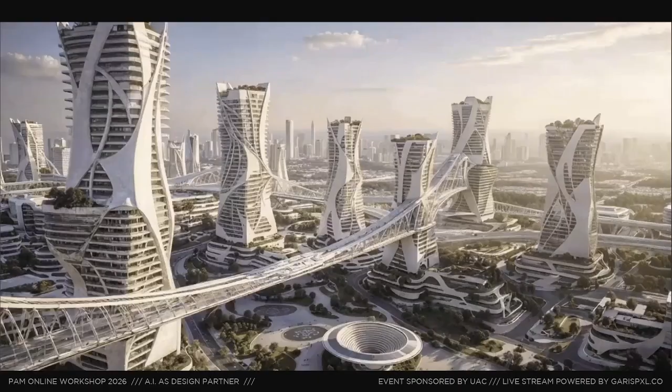So hopefully this becomes a great starting point for a longer, broader conversation into the changing practice, this new and emerging landscape that is unfolding underneath us. So I'll be describing AI in architecture, the future of practice, and how really the latest generative AI tools are starting to have a considerable impact on day-to-day practice and a considerable impact on the creative profession. This is from a workshop we hosted, a student, Prasana, who completed this in just a few hours of first using the tool.

Now, a brief introduction, I think it always helps. From myself, I am an architect by training, originally from Italy. I studied at the Architectural Association, worked many years at Foster's in London, Foster and Partners, and then went to Harvard, started my own practice, did a lot of consultancy work, advising medium and large practices in these earlier days of understanding what AI was going to change and influence in the profession. And it's been really exciting to work on a national level with RIBA and the AIA in the US in their AI expert advisory groups. I also teach at Harvard, and I like to keep an academic hat on as much as possible.

Even though things are really exciting and kicking off with this platform, which I'll give you a glimpse into in just a moment as a segue for broader conversations. But this is a glimpse into Xfigura. You can see us as an early ideation and concept design tool, which leverages all of the best generative AI models in one place.

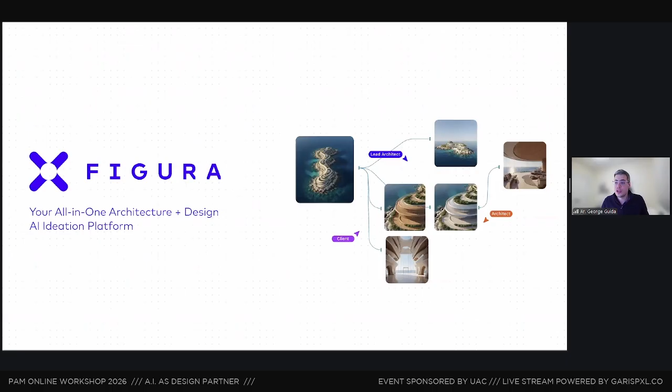Okay, I'm going to take a next step and jump into AI tools in practice. For this, I will be using Xfigura, the platform which I founded over a year ago.

We have seen incredible growth in the last 5 months. We're a team of almost 15 now, and we just concluded a big fundraise, so we have a lot of great momentum internally. We have a lot of new ideas, and I'd love to hear your thoughts in the Q&A, and answer any questions you might have on this or other applications of generative AI workflows in architecture.

I couldn't do it without this incredible team. Our partners have really been expanding and growing in the last few months. This is a short list of a longer list of clients. We are mainly business enterprise first, but we also collaborate very closely with universities and institutions globally, from Harvard, Penn, to American University of Sharjah, London, Hong Kong, all locations.

You can see the platform Xfigura as one collaborative platform in which you can create endless workflows, endless possibilities within this ideation and visualization framing. We have all of the best models on the platform already, about 70 models. We handpick these and get a lot of feedback.

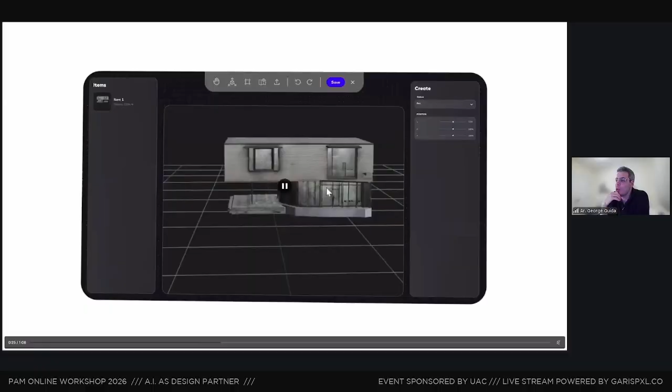Every great design - so this is a glimpse into the platform. Every great design begins with a direction, from a single idea in which we can start imagining different possibilities. You can see the infinite canvas here. You can click and then create - essentially you can see these as mini apps. Each node is connected to one another. You can navigate from one node, from images to videos, and go back and forth to render, to relight, to make videos, to convert images into 3D. There's so many fun different workflows.

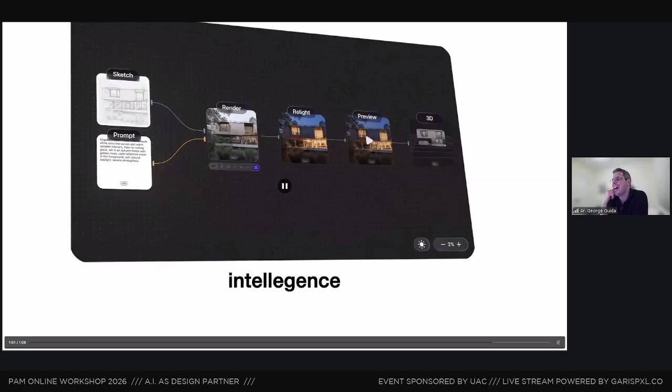And then of course you can create lots of automations, templates. We are launching - well, we have launched - agents, and this agentic space is just going to get better and better. We're fully enterprise ready, you can share boards as view only, as edit only. I'm going to try not to put a sales hat on and keep this more conversational and workshop-like, because I'd like you to take as a takeaway from this call more of an exposure into the different models and different tools. If anyone is interested, we have the credits, and we can engage in conversation and guide you along this journey.

So these are some fun workflows that we have embedded in the tool. These are all of the core concept design workflows. Now it's important to understand that the basic, fundamental workflow of these generative AI models starts very much at the prompt.

If we understand how to communicate design intent, how to communicate an idea, we are almost there. It's really interesting - this constant conversation between understanding how to work with these tools. You still have to learn how to communicate with these models, but also how to take one step back as a designer, remove any intuitions we might have on language and how we describe architecture, and really boil things down. Let's describe materials, shapes, aesthetics, camera locations, a feeling, an aesthetic. There's so many things that we might otherwise take for granted, and now we have to really describe.

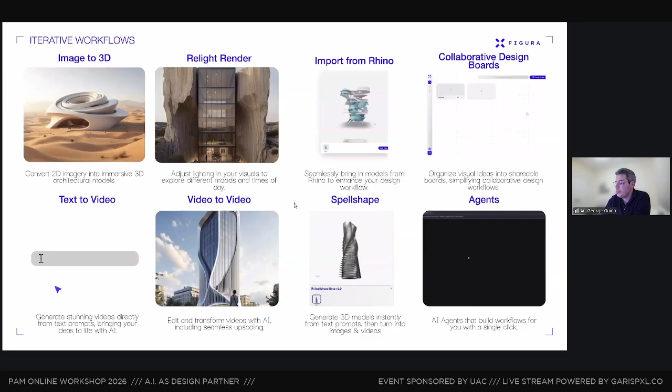So these are some other workflows. We're seeing a lot of interest, a lot of use cases in the video space, and I'll give you some glimpses, as was asked of us, to show how some companies are engaging with Xfigura.

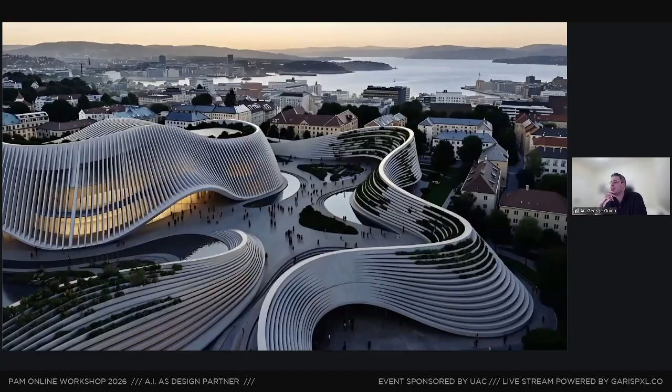So this is just a glimpse of some video workflows, of some transformations, of some geometries. Now there's lots of video models out there already. And what's interesting here, you maybe can't quite read it, but we're starting to stitch the very first frame with the very last frame and then combining these together to create different scenes and different connections.

This, I would say, actually is not the latest models out there. There are models that produce much higher resolutions. So in Xfigura, we like to question different topics.

Can AI actually participate in design? Can AI actually participate in the thinking process? How as a platform should we engage? How much agency should we embed within the prompting mechanisms for the architect, and how much should we support within that process?

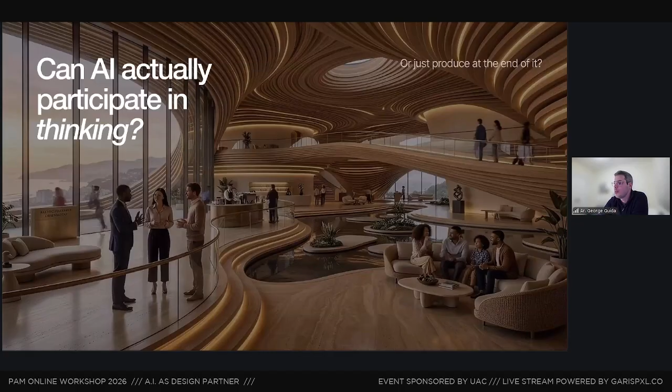How can AI actually participate in creating workflows? And so we have an agent now which does give the possibility, from a text prompt, to create a full workflow already.

And so our mission at core is really to enhance and not replace architects and designers. And so we're really trying to push for a new type of design quality, versus merely discussing things of automations or templates, which are often at times prioritized.

So this is just a glimpse into some workflows that are being used in different practices. We've seen an incredible adoption from companies, for example, at Big Architects. We've got adoption across multiple offices, same with Zaha, KPF, FaulknerBrowns. We're seeing hundreds of users within each of those practices really push the design conversation, or also really start producing in new collaborative ways within teams.

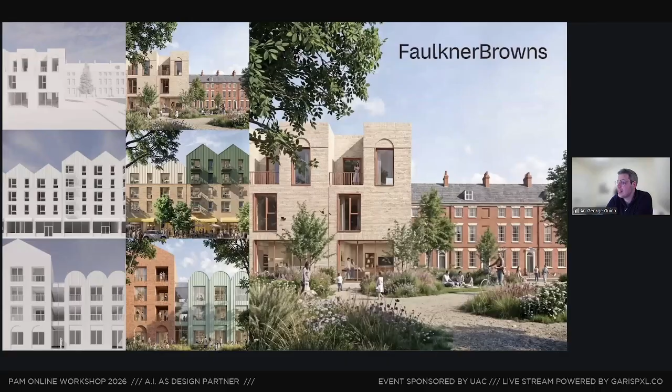So this is a glimpse into how FaulknerBrowns, a British company, is using it to go from clay renders into final client-ready images. These can be further upscaled, improved. They can be sketchy, they can be stylized in any way. However, with a few controls and prompts and iterations, you can get to this quality.

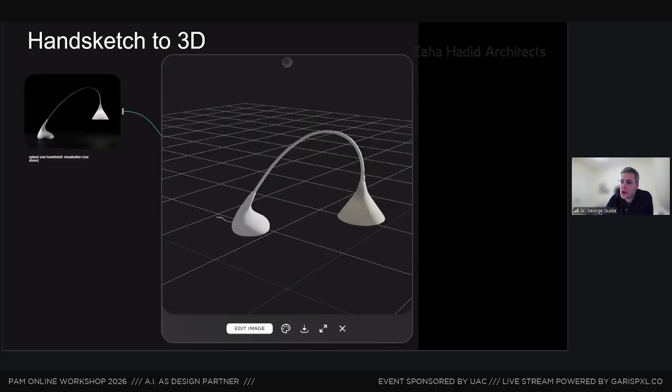These are some images to show how Zaha is starting to engage with it - in relighting scenes, in converting images into sketches, into extracting materiality, or starting to convert different shapes and apply new tectonic systems to their interior spaces. This was part of an article that was recently published with RIBA Journal that just came out, I believe, a month ago.

And finally, this brings us to Big Architects, also really diving deep into so many workflows - going from single images, changing materials, changing times of day, adding people. They've explored so many interesting conversations and have been really central in influencing our roadmap and helping us understand what is useful, what type of tools should we start exploring, and how are architects actually engaging with these.

Relighting, material, model explorations from physical to digital, digital to physical, image to 3D model, back and forth - we're seeing such interesting possibilities across these practices. So we're seeing this gradual shift, and this is up for an interesting discussion I would love to engage with, which is a potential shift from AI solely seen as a tool into AI actually seen as a collaborative agent.

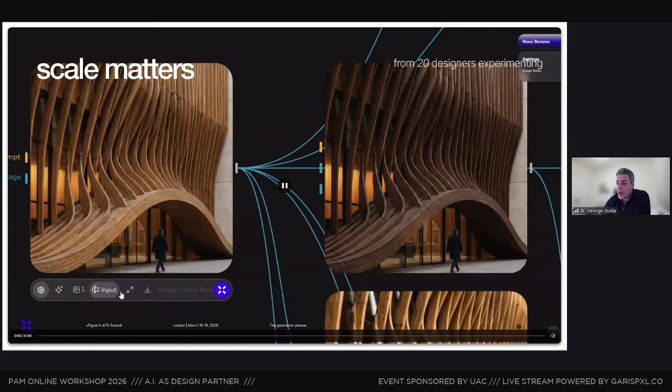Scale matters, so we can begin from a single workflow. We can explore super high-res images. We can make more complex workflows. We can go from the high level, from zoomed out views.

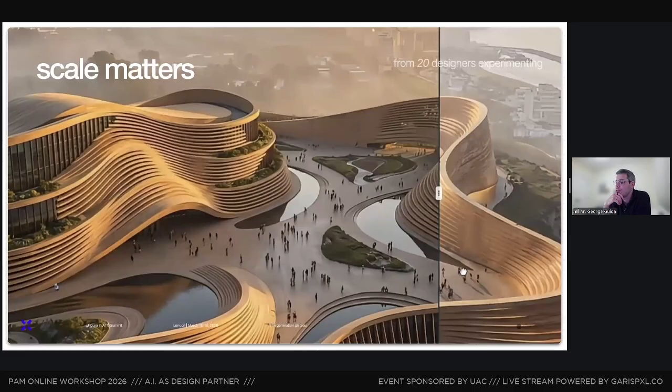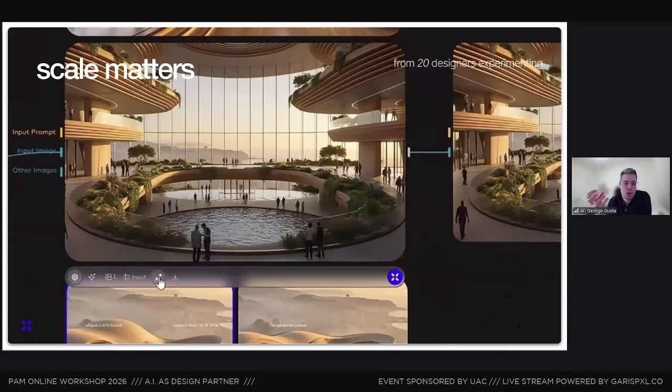We can zoom straight into details. We can leverage these generative models to give us a glimpse into different tectonics, different systems that even form the assembly of these. We can then in-paint, edit some images—think of it as a mini Photoshop already embedded in the platform.

You can change views, you can prompt, it's very versatile. Now it really boils down to understanding how to prompt. How can you converse with these models? How can you engage or ask the right thing based on your own design intent? These are just to cover a few other workflows.

Now, it's important to remember with these models that there's no physics understanding. If there's a column flying, spinning, or doing strange things, that is back on us as architects, with our disciplinary knowledge, to say okay, no, let's stop for a moment.

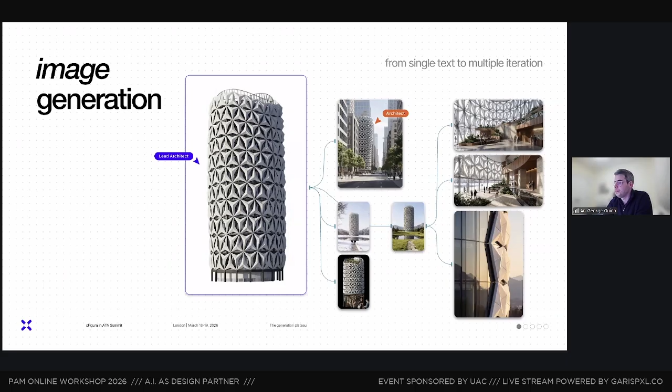These are trained on image datasets. They do come with a full bias. There's no such thing as an objective dataset. So with that awareness, we can prompt and bring in our own subjectivity, our own references, our own styles.

And we can begin moving past the single image and start bringing a client along a journey. Let's actually move past the static render and begin discussing immersion, storytelling, narrative. Let's bring a client throughout this building, from the entry to the spaces, to interiors, to across a site.

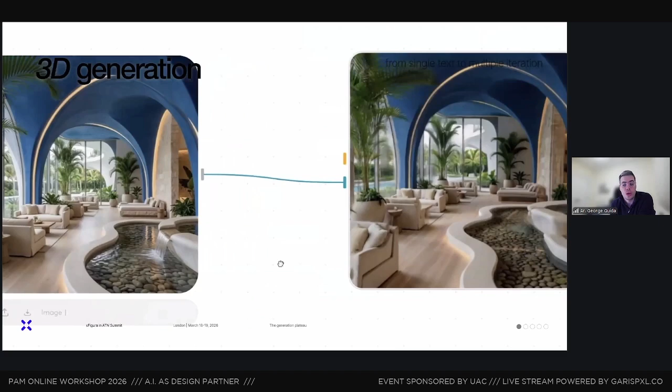Now this is gradually expanding. You can see this is a glimpse into the world model. This is by World Labs. It's a model called Marble.

So you can convert a single image into a 3D space. It is imperfect today, but it's a really interesting glimpse into how things are going to change. And so from the single image, you see we're able to create a full space.

This is what's called—going back to the technical—a Gaussian splat. Think of it as a point cloud, which is, of course, for architects, very difficult to work with, but it's opening up a new type of conversation.

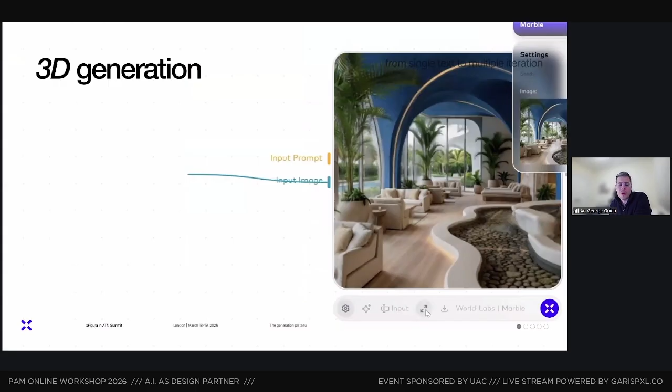Can we start designing with prompts? Can we start editing in different ways versus always having to have the full editable surface? We have added some multiple workflows in this so you can use it. I would say the use case of this for now is to change the view with control of an image.

You can now keyframe a video through this space. We're launching this very soon. And then you could do a video-to-video workflow and then create a view or an animation through an interior space. This does not work very well at all for 3D, for exterior spaces.

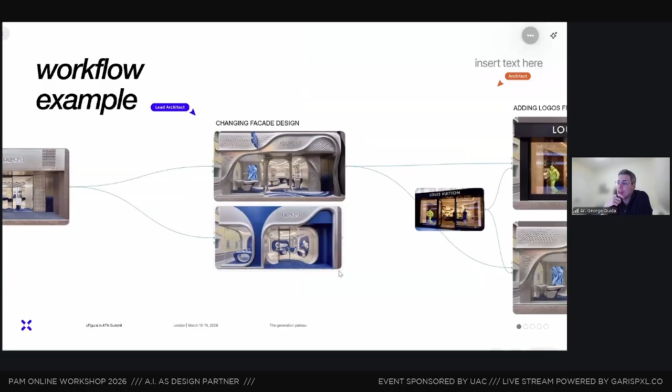So think of the use case more on the interior side of things for now. This is just a glimpse of some other workflows. So we have a render, an input render, maybe lower res on the left.

We can then convert it and ideate here. So let's ideate, add a Louis Vuitton aesthetic. Let's bring in different bags. Let's bring in interior elements, and then start creating our own workflows.

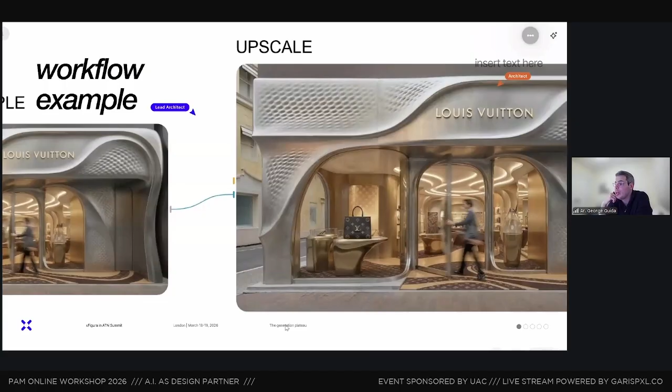I want to change the flooring. I want to in-paint, so I can paint like in Photoshop, add people in it with a blur. That may be something I want.

And then our final image is an upscaled image. You can see it's times two. And so you can get, this is pretty much a render-grade output. You can actually upscale much more than this at times four, or use some of the other models as well.

This is a last example of a workflow in which you can create different scenes, different moments throughout a building, and you can see how you can start bringing a client along a journey through different moments, different seasons, different spaces, through concept designs, through sketches.

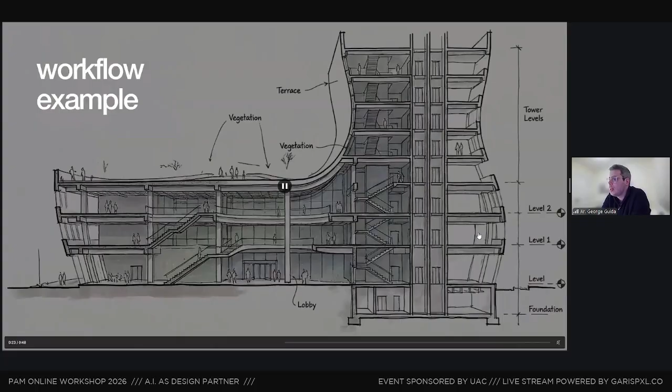It's really fun. We've seen so many offices really engage with these tools across all different stages within concept or competitions, even for submission boards. So we should really start expanding the possibilities, and we need to think less about the actual individual render, but more about what we as architects bring to the table.

So to close, and for some final few slides, I wanted to highlight what's really coming out now, because everything I've described until now is gradually being adopted, and what's really coming in the next 12 months, actually it's already here, and its adoption will certainly come in the next 12 or more months, is this idea of agents.

So do we make better decisions alone or with the assistance of AI? This is an interesting conversation we're having internally. How should we build our tool to support architects? How much should we support them versus encourage a training mechanism to encourage learning, education, and this creative process?

And so part of what I teach and part of what we build at the core of Xfigura is this solid feedback loop of information. We're never trying to replace architects. It's always giving architects this full multimodal control. Hence our opposition to the current trend, which is the no UI trend.

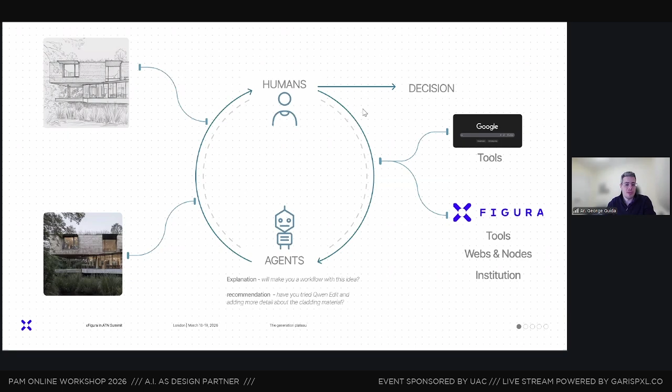This is a small glimpse into our current agent. This week, by Monday, we'll get a big upgrade. So you're going to see web search, you're going to see a lot of new automations. But at the moment, what you're able to do, of course, is enhance prompts and all of the basics.

But you're starting to be able to use different tools from this prompting interface. So you can text prompt: I want to generate a workflow of a tower with a video, and then use different prompts to automate those videos. And so it's a text to workflow. It can create that custom workflow, which is very much different from one architect to another.

Some closing images, 2 slides. This is just a glimpse of some other tools. You can obviously upload your own geometry. We have an editor, which is like a mini Photoshop, and then you can control parameters or actually train your own image data sets.

We do have all of the necessary plugins at the moment, so you can use Xfigura directly within Rhino. You can use it directly as of this coming Thursday. I believe we will launch it in Revit, and Speckle is already live, and you can connect Pinterest. We've seen a lot of interest in tools, creative tools like that.

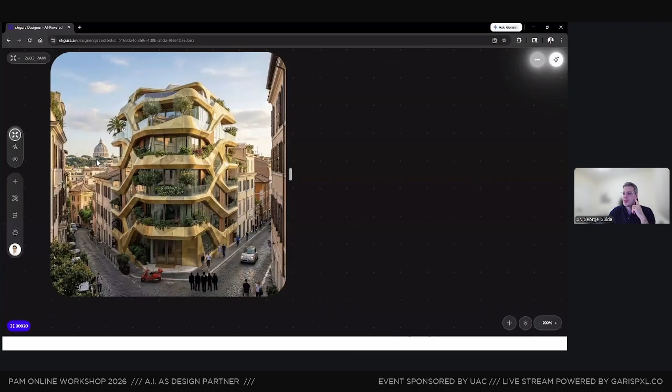So what if I have an image? Let's say, what if I had this image I really liked and I liked the aesthetic behind it. I grew up in Rome, and I was thinking, what if we could think of a palazzina or an urban block in Rome and reimagine it in a crazy, provocative way. We also connect that to text and start getting the description of that image. So all I'm doing here is reversing the process—going from image to text as a way to teach myself how the model is understanding it.

In this case, a common application is using a past render we've spent thousands of dollars on. What are the prompts these models might use to understand, to then generate new images? A visually striking futuristic apartment building—you can see now we're getting the model's interpretation or suggestion on how we can start engaging with these models. This is an excellent design discussion, in which we can start understanding what is necessary for us to communicate our design intent to express this level of complexity without any assumptions. So we can describe what's in the foreground, the camera location in a certain perspective, what's in the background, is this a tessellated materiality, what is the material?

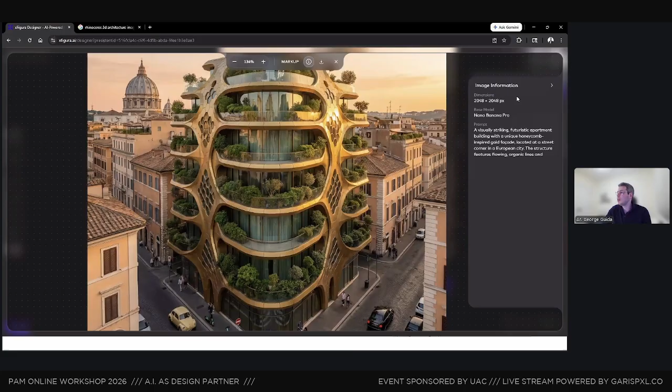Usually a faster model. Please feel free to write in if there's another way of signing into the webinar - maybe that's a question in the chat.

So what we're doing now is image to image. And what we can then do, what I do suggest, is continuing this workflow - really iterating and adding steps along the way.

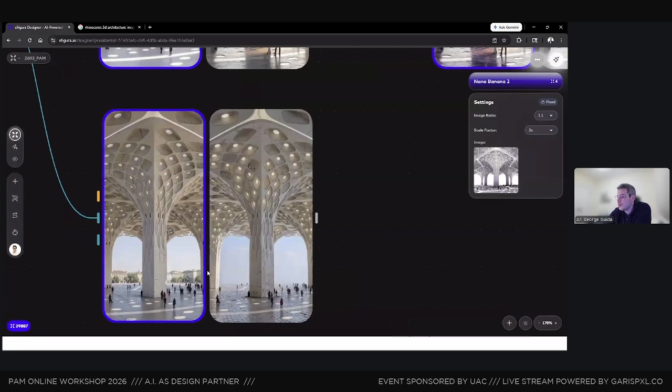golden, what is it? Add golden cladding within a tropical environment. We have, where was that added, some other model with Kling. We have the 4 options we can choose from, right? Colder, cold. Maybe we should have done the more tropical one. And then you have a 3D model.

This is, I use this more to show its limitations. This works much better on the object scale versus interior scale. Let's see what happens.

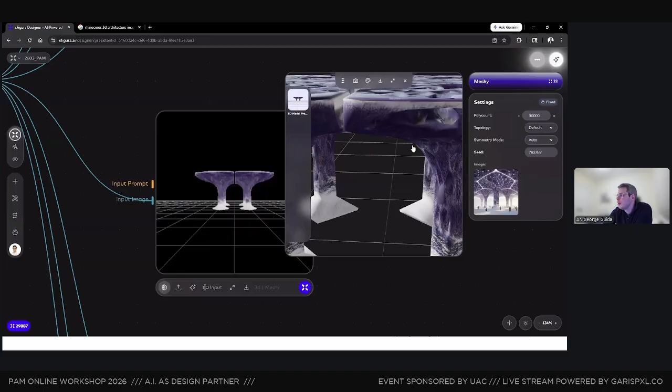Okay, so you see the resolution. In this case, we could have chosen a higher poly count output. Sometimes you do not need a high poly count output. And you can choose what type of topology to have as an output, it can be quads, it can be different formats. So you can kind of see the resolution maybe wasn't enough here, but at least you can start getting a basic 3D model that you can start putting in renders or start assembling within a scene.

I would say for some geometry it works very well. For other geometry it does not work, especially when you're adding a lot of detail. But these models are always improving, literally every few weeks or week.

Okay, so you can create templates, you can automate, you can always access your history if you generate over an image again, and you can browse that and literally drag anything back if you've lost it. If you overwrite, click generate once more to get more images.

So this is, in a nutshell, the core workflows behind xFigura. I'll take a few moments to walk you through some workflows, a quick intro into prompting. These are things that we offer as workshops to our enterprise clients.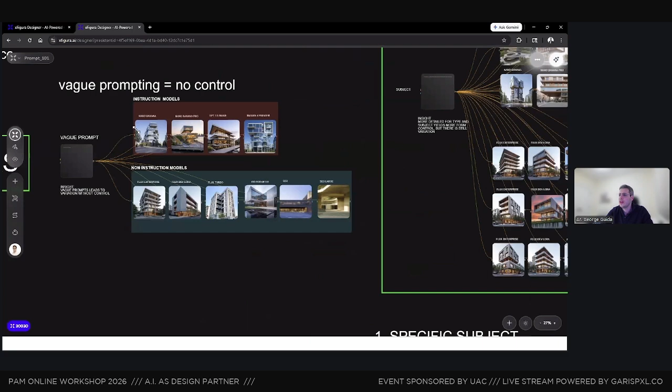We go through how to prompt for interiors. We compare all the different models, let's say from modern buildings, talk about biases. We compare the old non-instructional models to the latest conversational models, and how prompting really has an important impact on that final result.

Adding details, adding specificity, doing text to image, and these are the core use cases as explained. We go from a floor plan to a render, and we have an interior space, and then add a material. This is the same topic as the style transfer or the blending of images.

We can say within the prompt, change flooring material using the second image. A very simple prompt, and it keeps the coherence input to output, and then we can see, okay, that's the result. We can use the editor to bring furniture into a scene.

From here, we can place it. We can rotate it with a prompt. We can add whatever really comes to your mind, you can do it.

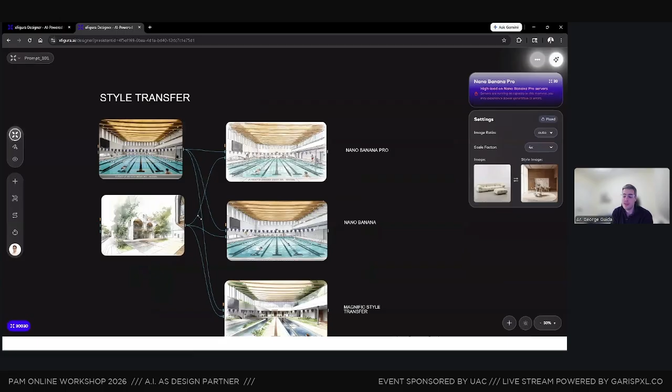Now, what I really find interesting, especially within concept design stages, is going past the hyper-realistic. You can, of course, always do the hyper-realistic, even with style transfers. But what's really interesting also is within this concept design stage, could we leverage models like Nano Banana Pro, or let's see...

Magnific Style Transfer, which is one of my favorite models actually. It does really incredible style transfers and keeps the original input style. And so maybe the input was not exactly an input that I would have used, but you can see from here, you're able to get really interesting concept design images in whatever style that you like or are interested in.

This is how to add materials. So we can have an input image. We can combine not just style, but also a tectonic system. Could we add this module within our interior?

And so what we're doing here is we're prompting it in a way: add the unique elements from image 2 into image 1. It is a very ambiguous prompt, so it does give liberty to this model to interpret where to place these. I would say still imperfect as an output.

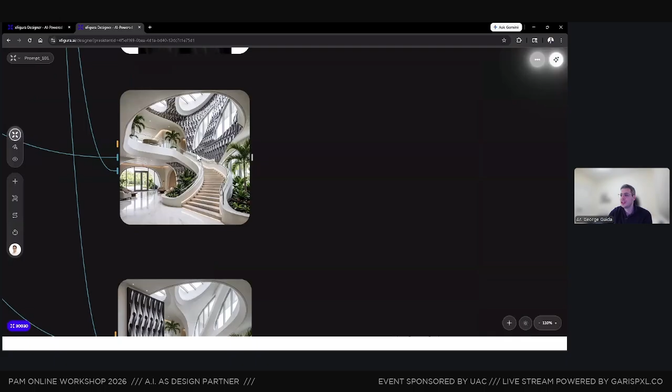But we can be a little more intentional about how to apply it, where to apply it, or how to add it, even, for example, as a large painting within the scene.

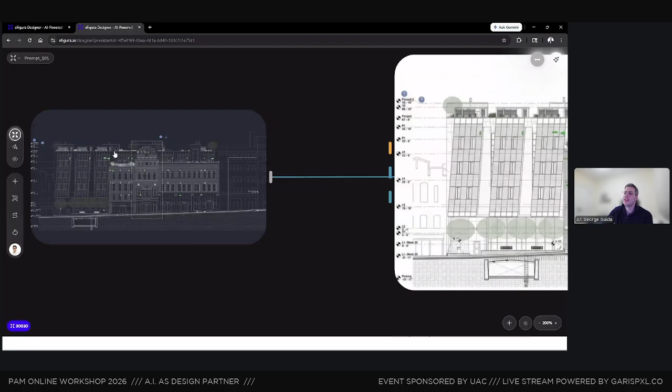Yeah, so these are a lot of different workflows. This is a glimpse into some of the latest Revit tests that we were doing: exporting a Revit screenshot, converting it into an image, and then rendering that image from this right here, and then actually testing out different materialities.

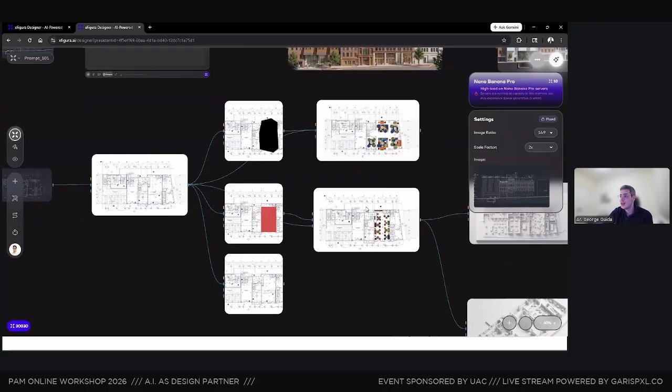Of that geometry, we can even work on the floor plan, and I will say that these are raster images. They are not lines that you can actually edit, but these models are getting incredibly good in a way to be able to... this is not the best example. There are way better examples than this.

You can start changing representational style, getting axonometrics, different views, all starting from a single floor plan.

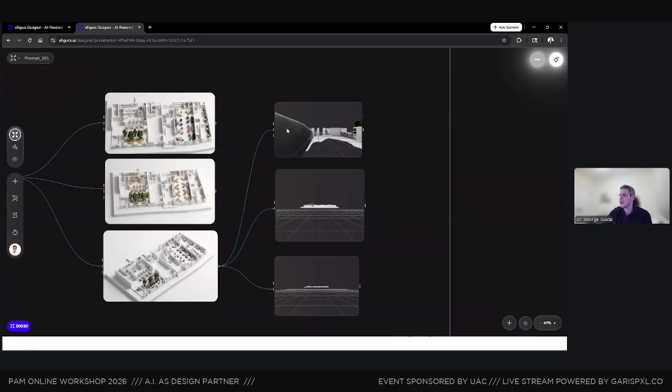So here you have a representation of that floor plan as well. And then you can start populating or getting different elements, different views, all within it. And I would say this, then export it as a 3D model. It will not be perfect, and it will still be mesh-based.

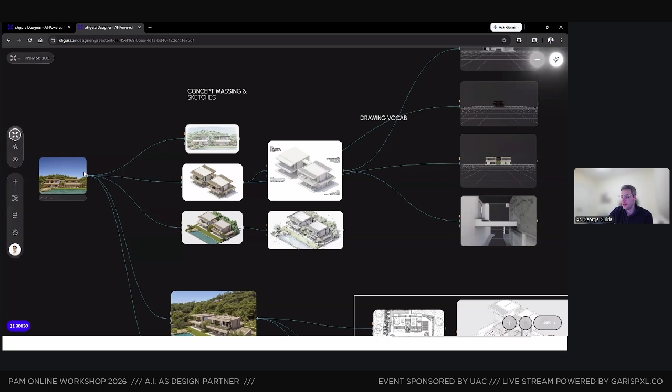What's also really interesting, and I think I'll end with this remark, so feel free to post any questions for the next 10 to 30 minutes if things go over, of how to use the tool, or any questions you have for me at all.

But you can see from that we can really start going from a single image. You might actually have a render of a project, and you might want to then abstract that render and pull it back a few steps.

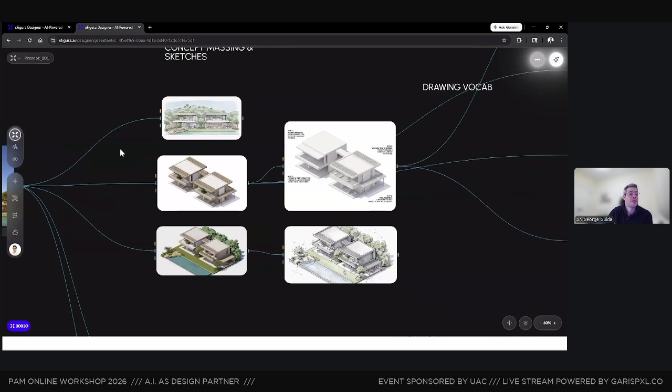You might want to then create a sketch from it. You might want to then, from this image, convert it into an axonometric view, clean diagram, ready for an InDesign document or for a presentation, or a more sketchy kind of snippet aesthetic.

The limitations are really as far as your imagination can go. Clearly, there are assumptions in these generations of what's behind the scene, for example, we have no idea from this image if there was a louver in the back, and this scene might be incorrect as well. So sometimes you have to embrace, prompt, or work around these imprecisions, but the quality is always improving.

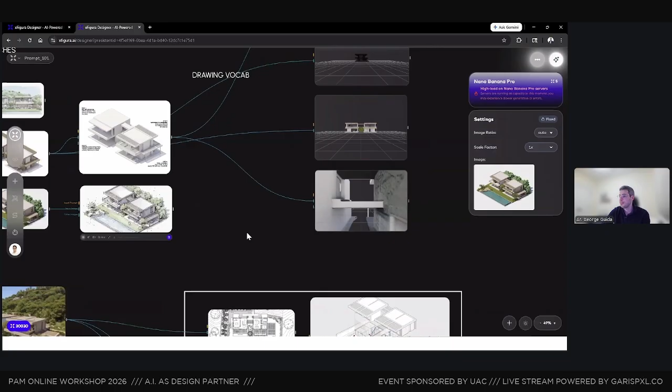You can then convert that, let's see, with Meshy, with the same building, what the output is able to give us. So much better than the other output. I still know there are outputs that are much better than this. I think the poly count might be low.

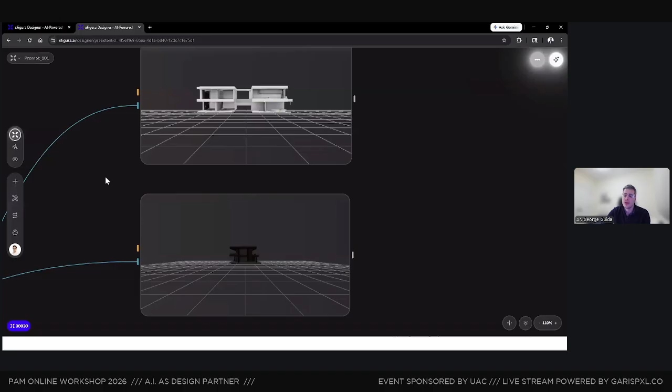Let's see, Rodin. Cleaner geometry, still imperfect. This just gives you a glimpse of the level of detail that you can currently get, when there's other methods, which we're working on now, of integrating through Rhino or different tools and leveraging those software architectures to leverage surface geometry and whatnot.

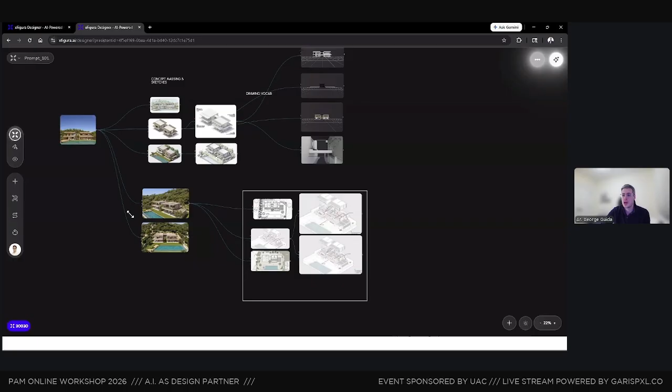You can then change views. You can do aerial views simply from a prompt. Top view drone shot of the residential building. Again, not the best prompt in this case, but we can use those to then create a full diagram, a full concept sketch. And you can add people within scenes.

Hopefully this was a good glimpse into some of the workflows. And let me just give you a glimpse into some of the R&D work and some of the collaborations that we are actively interested in.

Right here, what we've done, we're using Spellshape, it's a collaboration. We can go from a single text prompt into a parametric model. Now, this is not a workable solution for day-to-day, but use it as a glimpse, and it's completely free to use as well, into where things can potentially go in the coming months.

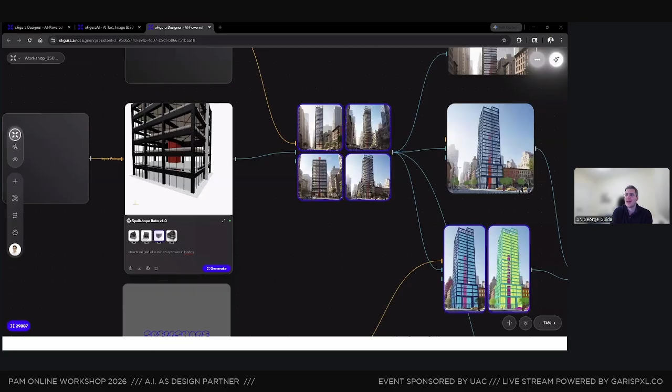I think we've covered a healthy amount of ground. I hope you're all now graduated, and I hope you're all now AI or concept design AI experts. This is obviously the tip of the iceberg of many of the workflows. The agent is on the top right. There's a lot of things that we're launching in the platform. We would love your feedback.

And I'm going to conclude just with some final statements before opening it to the Q&A. Now, all of this does require broader conversations about responsible AI, potential regulation to a certain extent of certain AI workflows. There are broader AI ethical discussions and policies that should be brought within education. It is a constant discussion between academics.

And could there potentially be a certificate that certifies projects, people, or practices in the same way as LEED accreditation does? I would say that today, or yesterday actually, AI could be seen as a tool, but today or tomorrow, it can be seen more as a collaborative agent. Architects, I do not believe, will be replaced, but architects who do not engage with these tools, I do find, will be at greater risk.

And the final remark is that the architecture profession at large does need to evolve. We need to embrace deeper discussions about what values we want to instill and promote in the tools, but also how to design and be creative while keeping our agency and standard of care within the creative process.

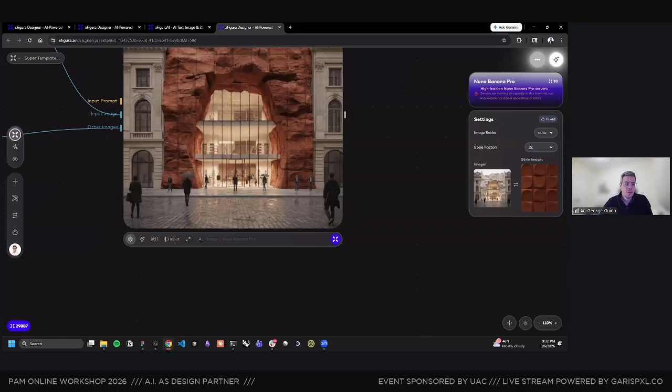Okay, for the question before about generating a scaled model - let's see, not sure if I have that. Yeah, I don't have that on me right now, but you can use a floor plan to generate a model. However, that model will not be similar in detail. It will not be surface-based like you would have in a SketchUp model. So it will not be to scale, because these models don't have a physics understanding.

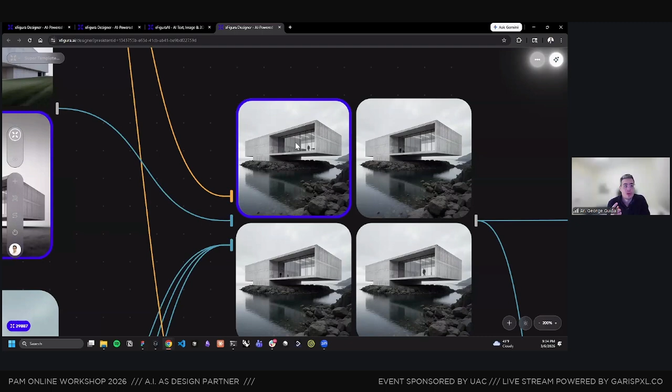For example, from an image like this, you can't just say 'improve' - you can try to say 'change the number of windows within this from 20 to 9,' but that level of precision can sometimes be challenging. Or dimensioning - it's very difficult to prompt a dimension because these don't have a dimensional understanding of space. It's more based on hundreds of thousands of past images.

Does it work based on proportions, ratio? Proportions work very well. It's very much a prompting game - there are many ways around prompting and adding scale, but you have to be flexible, like from that dimensional mindset.

Okay, next question: how does the credit system work? How does the credit system in the subscription work? Oh, of course - I can see you got like 29,000. I just registered, I got only 400. Yeah, so yeah, this is our office.

The team has used a lot of credits. Every office as well. We go from the enterprise plans, which go from 5,000 to 300,000-plus credits depending on the size, and that's a monthly credit use.

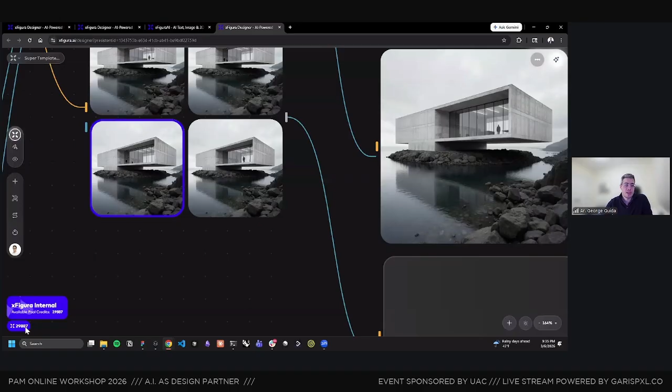So you can see on every model, on the right hand side, when you select the model, like Flux 2 Klein, it's 2 credits. Some models are 1 credit, some video models are 3. It does vary by provider.

When you get a plan, you typically start at 400 credits for the base plan, and that refreshes every month. If you run out of credits, you can top up at the bottom of the pricing page. There's a top up area as well.

Do they carry forward the unused credit? Credits expire every month. So you can get a lower plan and top up. There's multiple ways around it. Okay, understood.

Next question: what is the recommendation on using a canvas? Is it per project, per canvas? Is there a limitation or parameter to be mindful of with the canvas? Is it infinite? What is good practice to keep a healthy workflow size?

Minimal hardware? Yeah, none of this runs on your local computer, so it's very light actually. The biggest requirement is mainly a robust internet connection. We're still processing quite a bit of data, so you can see this page is using 500 megabytes - it's like running a Zoom call equivalent. That's as far as the GPU or hardware requirements go; it's just having a good enough computer to run a website with graphics.

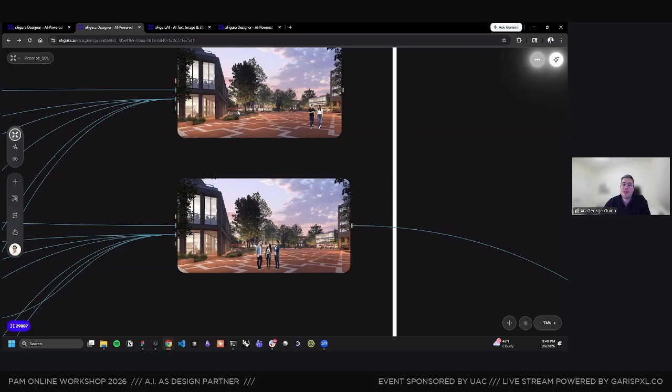The best way to do that, maybe this is an interesting example. We brought in silhouette people, or generated silhouette people, so you don't have copyright issues with downloading or buying silhouette images. You prompt for white backgrounds, then within the editor you can remove backgrounds or apply a texture, draw an arrow and say change this texture here, or draw a red region. From that, you can add all these people, remove the background, and composite it together. The same applies to what you're describing, which is right here.

Let's say we have that scene from before. I want to just edit one region, and you can, like in Photoshop, paint the region and then prompt in the next node and say what it is—add people in the red region, change just that. So you have a lot of control.

Oh, I think you're muted. Sorry, let's jump to the next question.

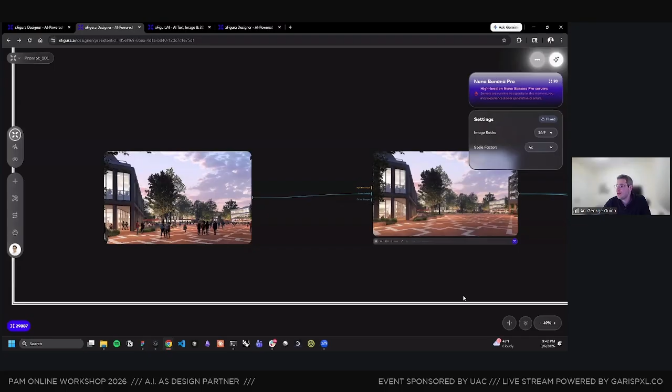Does the monthly subscription fee cover all the AI plugins in the list shown? Yeah, you don't have to worry about anything, any other models, any subscriptions—there's no hidden fees. You have access to every model, all with the same quality of export as the other providers, so Flux and every other model.

And you have the Rhino integration if anyone is curious. All you have to do is go on Rhino 8, go on the command line, and type in... plugins? No, I can't even remember. I think plugins, and then type in Xfigura—oh no, sorry, you go on the command line and type package manager. That's what it is. In package manager, you're just downloading Xfigura, and that's accessible to anyone who wants to use it.

Okay, we jump to the next question. How about the privacy of this workflow and output? Are they stored on the Xfigura platform or somewhere else, and can it be retrieved?

We take privacy as importantly as stability of the platform—they're pretty much our two main pillars. Data security and stability run hand in hand. We have custom agreements with third parties with almost all of our model providers, which means we don't retrain your data. You have ownership over your data and there's no IP concerns. This is mostly available for our enterprise clients, depending on what tier you're on. We have custom agreements that we can share, of course, but we do take privacy super seriously. The boards are stored, as they have to be, on Amazon AWS servers which are fully SOC 2 compliant, so there's no issues from that side either.

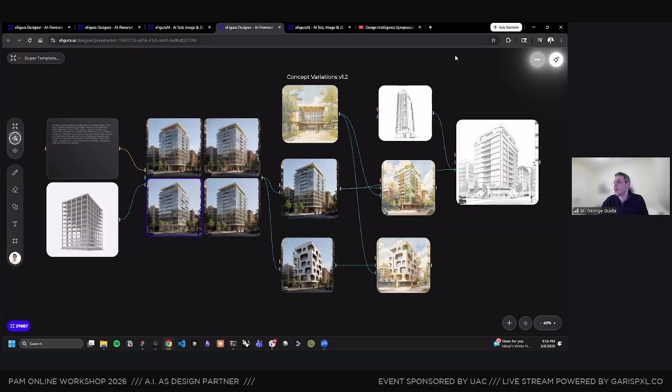What I think is still a huge problem is what data those models are trained on. It tends to lean on being very Western-centric. I think there's a lot of effort at a government level that should be put into embedding local culture, traditions, best practices, values, and morals into AI models. If you look at a company like Anthropic, the company behind Claude Code, they've defined what they call the Constitution - the Claude Constitution. It's essentially a set of morals and values that help define how every answer is given. This helps from the answering perspective, but it still doesn't preclude any of the biases within the training set within that foundational model.

Understood. So who actually organizes Claude? Well, it's like a competitor to OpenAI. They're one of the biggest large language model providers - Anthropic, Grok, OpenAI, it's one of the big ones. I use it every day, Claude Code specifically.

If anyone's curious, this is how you run it - this is a version of it. You can run it in terminal and just ask it whatever, connect agents, all of your tools. I'm going way past the subject of this talk, but yeah, this is bringing new automations from a productivity level that are completely unparalleled compared to what we had a few months ago.

The basics. First, I'd like to bring up this disclaimer: what we're all talking about in this session about generative AI is all about early stage conceptual design and ideation. It's a catalyst for rapid exploration of ideas well before formal drawings or documentation. So please take note that whether you're generating images, videos, storyboards, or narratives, they're all for us to think about ideas and bring them into the next stage of design development. Think of AI as broadening how we iterate and imagine new possibilities in design, rather than a replacement for the unique human creativity and judgment at the heart of architecture.

Our entire digital world is powered by AI nowadays. When you go to Google and type something into the search engine, it will come up with an AI mode summarizing things for you. If you're looking for interior design in Singapore, in the older days you'd get a list of websites, but today Gemini appears first to tell you what you're actually searching for, giving you a summary, rough ideas, and recommendations. This is also powered by AI when you click on images.

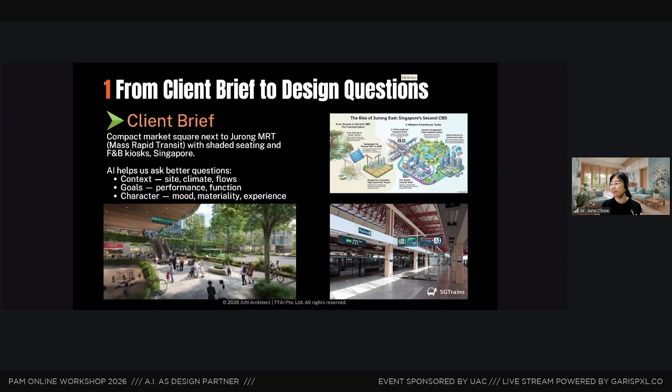So what would you do? If you have Gemini, you open it up. Where should we start? First, you have this interface where you can see a text box where you can type and ask. But I would strongly recommend having a paid subscription to Gemini if you want to use it. The minimum subscription is Plus, and you can also go for Pro and Ultra if you want.

Always switch to the thinking mode, so it won't answer you quickly without really thinking. In thinking mode, it will solve more complex problems for you, like doing real research on the internet before answering. Let's say we have this, we switch it into thinking mode, and we start with this.

You are an architect in Singapore - or you can say it doesn't matter whether you are in Singapore or not, because you're trying to give the language model some context. So given this brief, create a compact market square next to the MRT entrance at Jurong with F&B kiosks, seating, a covered path to the bus stop. And you give at least some instructions.

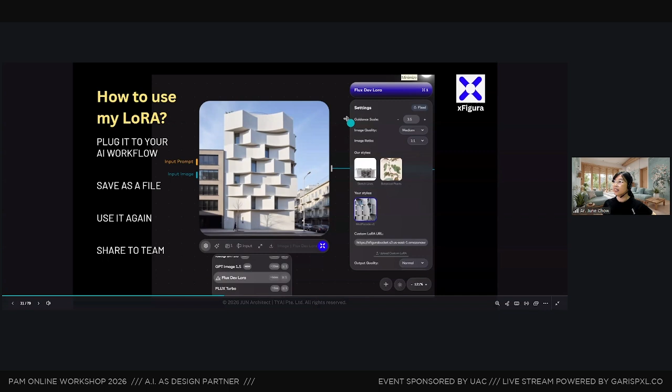Don't worry about the guidance scale yet because this is quite optimal - they usually set the optimal settings for you. And then image quality, you can choose high, medium, or low, but I always choose high, or image ratio if you like it box, square, vertical, horizontal.

So some of the in-house styles are already made by the Xfigura team for you to explore, but your trained LoRA will appear here - so this is your style. This is my LoRA, I have named it Mod Facade.

You can also find something like a custom LoRA if your friend, team members, or anyone else has developed a LoRa that you see is quite good and want to use. Some of them have uploaded it on some websites - you can use the URL, just bring the URL into here.

Or even if you have your LoRa on Xfigura on any other platforms, you can always save it as a file and use it again. So this is your asset, and you can share it to your team. On Xfigura, you can always upload your LoRa again on the same platform.

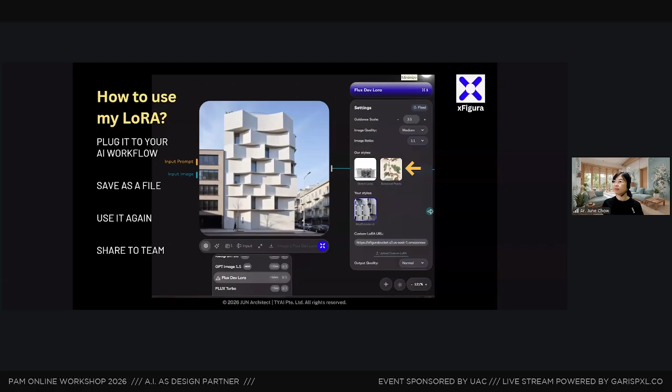Next, how to prompt with your LoRa again - this is just to revise a little bit what we have been talking about. The tip for you is always to keep prompts short if you already have a LoRa. Don't generate a thousand words.

For example, in this case, I have the gallery building. This is the prompt: gallery building, origami inspired folded facade panels, sharp aluminum. Very short, but I already named my LoRa, so I name it ModFacade.

So I give it a name, and the name has to be a little bit special - don't use generic names. Use something like a special name, let's say XX facade. Use specific names so that you can trigger the AI model to search for that specific thing, the unique word this user is using for his or her style. So pick a name which is really special.

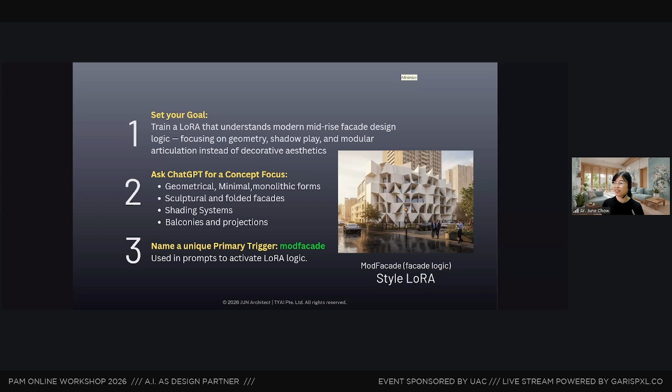If you don't want to play too much on the decorative side, you can ask your language model for a concept focus, saying what kind of focus you want. These are examples you'd feed into the language model—if you want balconies or projections, go for it. Then name a very unique primary trigger. In this case, I put 'mod facade.'

So what are we actually gathering here? The process: I went to the internet and looked for images. Again, you can also use your own firm's images, as I already said. So it's a little bit complicated here, right?

The main thing you want to look for—let's say we want to train this LoRa with 20 images. That's the minimum you can have, at least 20 images, and you can go up to 70 images, depending on your needs. Since this is a mock-up, we'll do it very small.

Then look at the ratio—why do I have 9, 5, 4, 2? This is a rough rule you want to set when training your dataset. That means I've searched for 9 images that really speak to what I intend to use for explorations on my facade. These are the 9 images I really wanted, roughly that kind of pattern.

So you have the honeycomb, some zigzag, some triangular niches, all right? And then something else you can also look for.

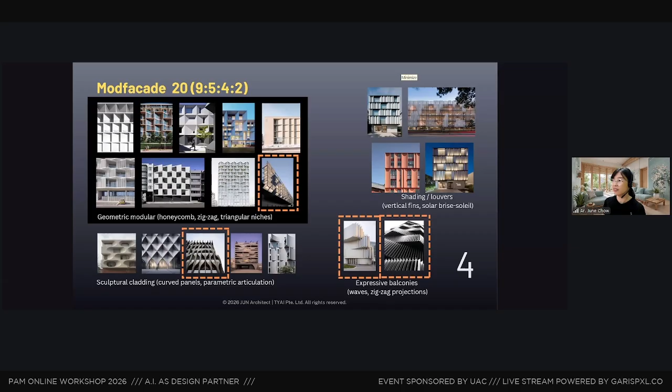But I also want to add something like a tilt-up, looking-up angle—in this case also looking up, right? And some of the weird shooting perspective angles that I want to add in here, and why.

So these 4 images are called regularization images, where they have different view angles. They might have a day or night view, or even monochrome. And it will have something like 20% to a maximum 25% of your set. That means like 4

out of 20 images, you want to have this set. Why? So in a nutshell, regularization images are neutral reference images used during your LoRa training to keep your model balanced. These images act like a control group to help your LoRa remember the general structure of the base model, like what a normal building actually looks like, so it doesn't overfit or become too obsessed with your training style.

You don't want everything to come out flat on your patterns. That's why this works well when you have a little bit of a hint of different angles, just to hint to the model that you're talking about buildings, not a piece of paper, something like that.

So to summarize, if I'm training a modfacade LoRa with 20 images, the settings—you don't have to worry about that because this is the flux model we're using to train. Sometimes the training duration depends on the flux model you're using. This is a fast one, only a few minutes, so on Xfigura you can do that. Or if you want a better one, let's say training 70 images, it would take hours. Also, the LoRa rank is auto-handled by the platform, steps default.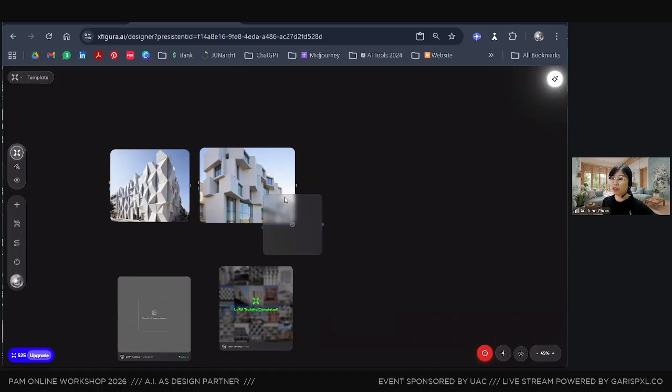If you have the training complete, you don't need to worry because on your infinite canvas, when you click on that, you'll see some information - don't worry about that. You want to already generate images, so if you double click, you want to have an image model. This is what I've done - let me demonstrate one more time.

On the blank image box, when you click on it, it will tell you that you're using Nano Banana, but this isn't the model you want to use. So go down here and choose the model that you want - remember the LoRa, just choose that.

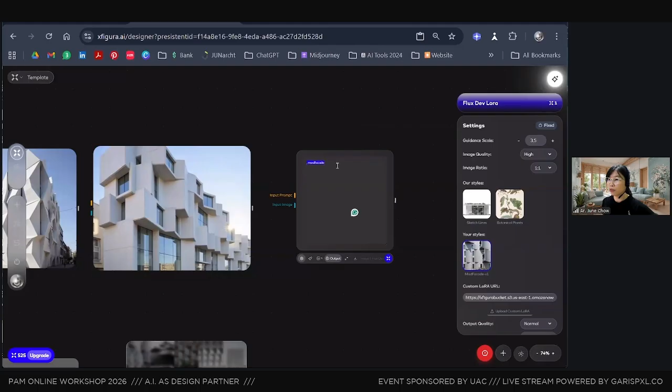So what will happen when you choose the Flux Dev LoRa - you'll have settings here, and you can choose the image quality, let's say a high one, and the image ratio. Then the styles - the in-house styles - but this is the style that you trained. This is mine; when you click on it, you can see it's going to have the trigger word already in my box before I prompt anything inside.

So in that case, I just want to show you that my Facade LoRa has generated this for me. When I click on it and click on the input, you can see some of the prompt - I just want to show you the prompt. So this is the example prompt I put in.

Again, the most important thing is your trigger word, whatever you want to prompt for an image. So be as simple as possible. A little bit of description if you want, because words like origami are quite strong in image generation, so use it with caution. Like angular geometries, if you want to really put a lot of weight on what you want to generate, okay, sculptural effect. That's why when I put in this prompt and start to generate, I get this kind of output.

And then again, going back to settings, if you are looking at a variation of this, always remember that we click on it, and you always have your style clicked, to have the trigger word there. It's blue framed, which means it's activated. And then also look down here at the output quality, normal or high, and the seed.

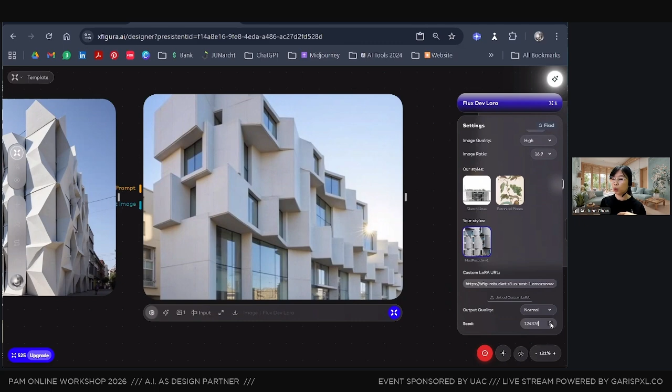Okay, seed again, remember that we're talking about variation. So you don't need to worry about what number that is. If you go up and down, you just create another variation. It will be really similar, but in another way. So let's just try one of it, and you will see it will pick something.

A seed means like a little seed, right? Where it comes from. So the AI model would go and find outside, in the whole world, in the big library, something like already an existing building, and then try to integrate it with your LoRa to create another image. So this is what seed actually means.

So if you're not happy with this one, click on another seed number, or you can even type your own number, I think, yeah. You can even type a random number. It will still get into a random variation.

So that's about it, and I will come back to my slides. Okay, so these are the examples you can get. You need to be a little bit practiced in your prompting skills so that you can get something really good, because some people say, oh, I have the LoRa, but I'm still prompting badly and getting lousy output. So again, you need to put a little effort into learning how to prompt.

So these are examples that I also used ChatGPT to help me enhance. So daytime shadow logic, night experiments, you can do that, but you will see always your trigger word is there.

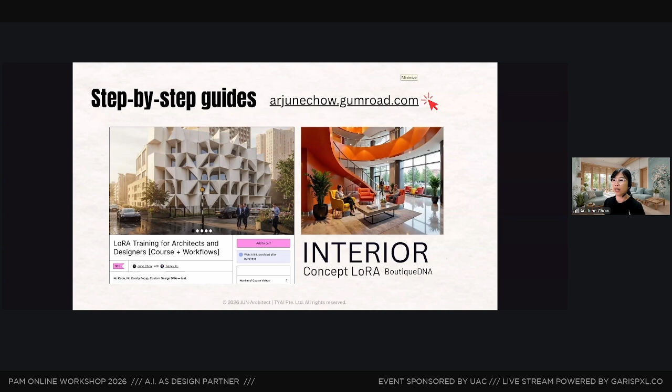And as a practical example, if you ask me what architects outside of us are doing, this is one very good example from Coop Himmelblau, from one of my connections on LinkedIn, the architect Albert Sumin. He's also a computational designer. He shared this, where he trained this LoRa himself using all the images and visuals from their designs, their signature designs from Coop Himmelblau.

And this was actually done maybe one or two years ago using an earlier model called SDXL. As you can see, he was trying to train it, and the VRAM needed was already quite heavy for the PC because he trained it on his own PC, but nowadays we don't have to, we can train it online. The speed of training for him was about 2 to 3 hours, and the dataset he chose was 40 to 70 images. Then he captioned the images one by one, describing each image. So it's a long process. These are the outputs he uses the LoRa to generate for their future experiments.

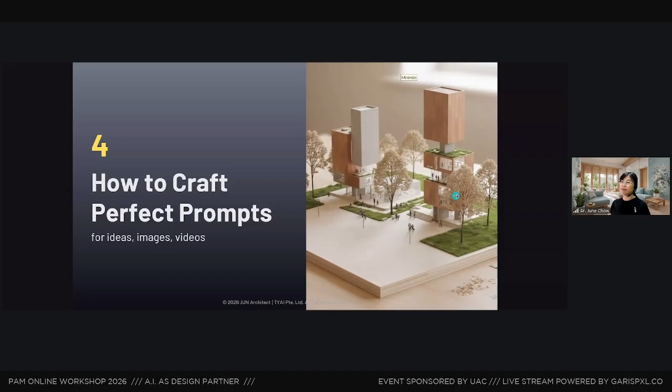How to craft perfect prompts. The right prompt matters. A general prompt, of course, you can always start on your language model or any image generation model -- just design a modern building. You won't do that today, I think, right? You know that it's going to be random. And a specific prompt will be something a little bit more. So don't try to be too imaginative first. Work on the basics.

Wait, I think there is one raised hand. Shall I address your question after this, when we end the session? Is that fine, Fira? We are doing -- actually we don't have much time. Yeah, yeah, that's why we'll do that on the Q&A. Okay, thanks. Okay, yeah, all right. So,

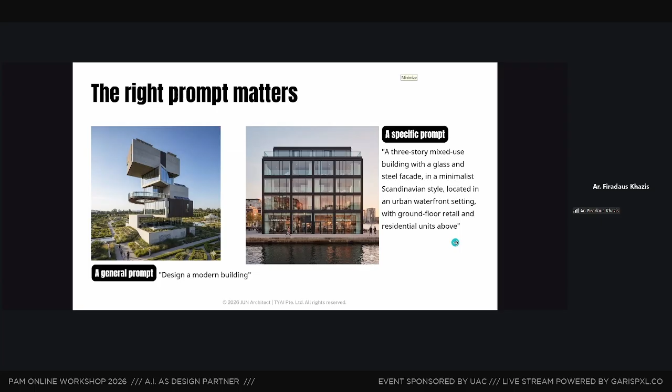So effective image prompts don't need to be too long, okay. Any model -- this is Nano Banana model. So on that, you just put, you need to have a modern minimalist villa. What you want to see in the image, and the context is where, what surrounds it. And in a pine forest, and the style, whether you want architectural photography with natural lighting. So this is just about that, and you get a decent image.

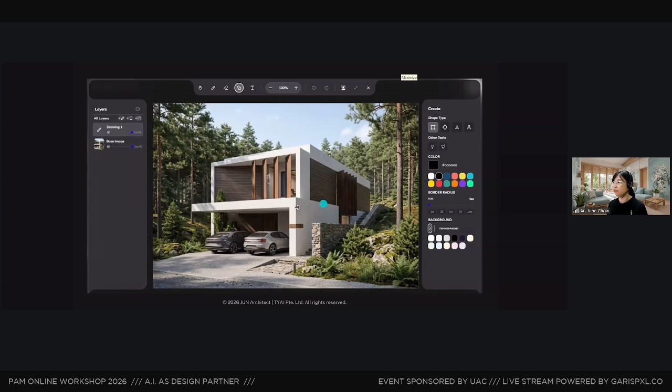And then this one I would just go through very fast, because after all, you won't be 100% satisfied with your generated image. You always want to edit that. So bring it to the editor on Xfigura. When you click on it, you'll get into this Photoshop-like interface, as he has already demonstrated. And then you can always add brushes, highlight here and change it to something, add something like human figures, use the lasso tool to delete somewhere, erase, recolor, retexture anywhere you like, or remove the background.

So I have it in the editor, just to add a silhouette human figure there, but when I come back to Xfigura, it will be a black figure. And then you can always pull out another node like that. Just use Nano Banana 2, the latest model, which is actually very cost-effective, and prompt it to render the human figure -- just write it in natural language, with photorealistic quality that blends into the image seamlessly. You need to say that: blend into the image seamlessly, and keep the rest of the image intact. If not, it will try to iterate on other parts of your image.

And technical settings also, but it does not always work very well, so it depends. If you don't want to go too technical, sometimes like the aperture, deep focus, bokeh, it might work or may not, in some of the perspectives. Product, yes, for bokeh, but not for houses.

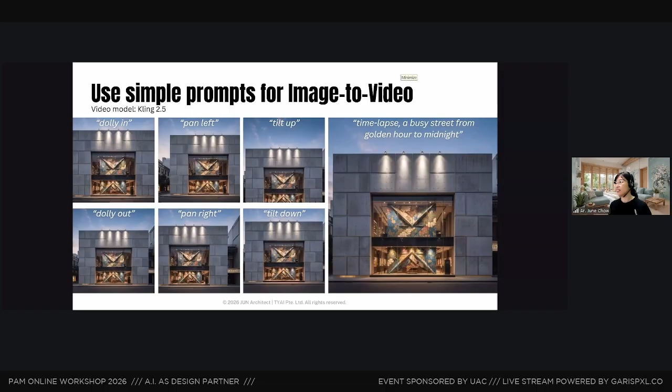Like this, so I also use one image of a batik gallery, a brutalism style. So I just type into a video model, say, dolly in, pan left. So this is what it will work in a very simple way.

Okay, finished with the AI models on Xfigura, but next, I just want to inform you that the latest news about video generation, if you really don't have any platforms or do not want to start with any platforms yet, you can go for Google Flow. So this is the website, the URL link. Go to Google Flow, or just type it, and you can create the videos already in this website, which is called Flow.

Use upload an image, and there's a box there, like this. Sorry, let me go back. You go to Flow, and you just need to upload an image of your generated or your visual, anything rendered, and you say, create a video of this image doing what, okay? So using some of the recipes that I've shared with you, try it on Flow.

Or in Gemini, actually, you can also generate the videos if you have a paid subscription. So this is my Gemini. I just did a very quick experiment. I have two images, this is a batik-inspired gallery I've generated.

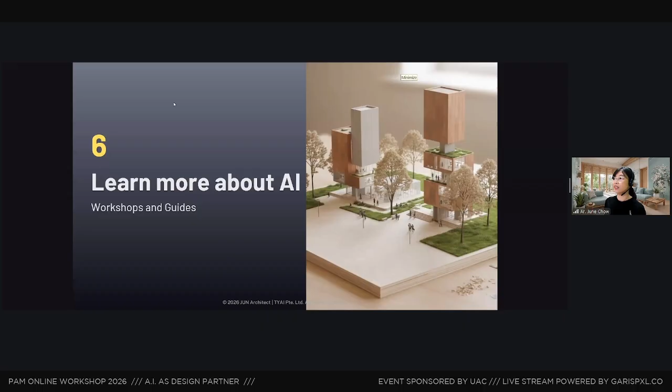And you can see that actually I already generated some notebooks for myself. Let's say I want to actually do a research of one designer architect, called Lebbeus Woods. So I gathered a lot of his information on Wikipedia or the websites, on the URLs I've copied here, the sources. And then the source will start to, using LLM, based on these 10 sources, try

to generate a summary for me at least, right? And then from the summary, I can start to ask questions, doing a research for myself. So it will start to answer you with citations. And you see that if you have the answers, not only that, but you will be referred to the source, where actually it comes from. This is very good for research.

And then in another example, actually I've done something using another method called the architectural anchors, the guide to design intelligence. Actually, we are talking about architectural logic in using architectural image generation models. And then later on, actually I found, because I have an anchor guide, I have generated a PDF and just

fit into that. So it will give me something, a summary, and then ask some questions about what are the logics. And after that, actually, what I want to show you is you just need to click, if you want a slide, you just need to generate an AI slide deck based on your sources. You can always choose—if you want to untick some of the sources, you can unclick those. And then start to generate something like this. This has been generated, I just want to show you.

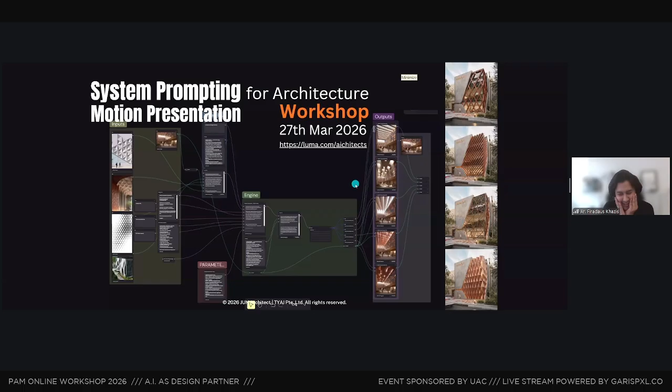Oh, that just response. A lot to absorb. The whole time I was like, print screen, paste. Oh, okay, okay. But yeah, good, I really understand that, yeah.

Yeah, because it's very vast. I've been in this field for maybe 3 years or more. There's a lot of information keep on coming, which sometimes even overwhelms me with the pace of it. But we try to learn bit by bit. For me as a frontier, I try to grab all the useful things and show you guys what's updated that you can follow, and something you can just leave it.

All right, I think we'll quickly go into the questions. From Shak Kai Lui: how do we identify a seed we want in accordance to a singular reference prompt? To have a controlled iteration, is the design identity the seed, and output of all the mixture of prompts we use in a singular time? Do we train the LoRA based on a singular prompt instead? I think you've partly answered this, maybe you can make a summary about the seed. Okay, wait, let me just go to the right question. From who is that? Oh okay, yeah I see. How do we identify a seed we want in accordance to a singular reference prompt? To have a controlled iteration, design identity is the seed, and output of all the mixture of prompts we use in a singular time. Do we train the LoRA based on the singular prompt instead?